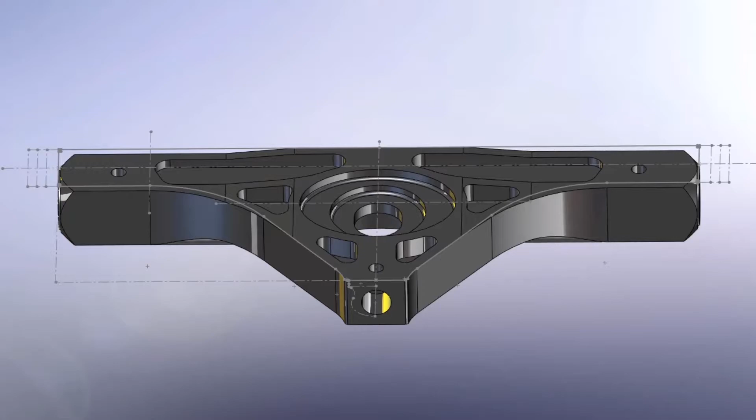We're excited to bring you the HSM and Fusion best practices today. Bruno's one of our normal presenters, and today we're also going to have Phil Brown from Autodesk. He's going to give us a preview of nesting in Fusion, which is a new development that came out earlier this year. So it should be a pretty exciting agenda today.

If you haven't been following Fusion, it has been expanding quite a bit recently, and they have added some different extensions. And so I just wanted to go over these at a little bit of a higher level. In fact, maybe we should go back to this other slide first. That's okay. Let's just stay on this slide.

Anyway, there's the additive build extension that has actually been out for a while. I think it came out, was it early last year? Phil, you might know the exact date when it came out. I think it was early last year. Yeah, it's been out for a little bit at this point.

Yeah, and generative design has been very popular. If you guys know, there's been big stories about Airbus and General Motors using this to redesign their parts and do really interesting things about lightweighting and changing really the way parts are made. That's more of a design extension for someone early in the design process.

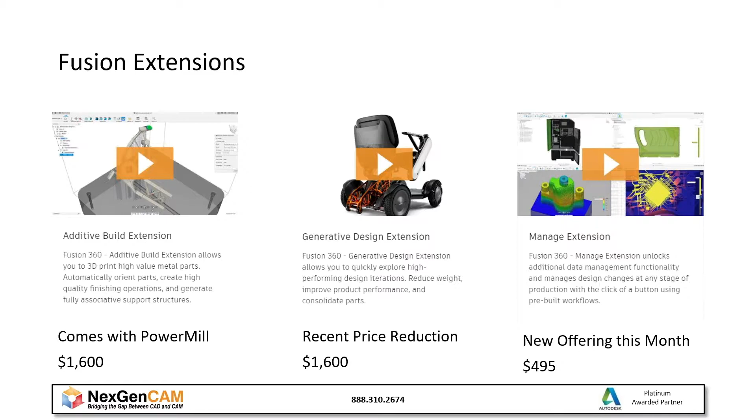So looking further into the extensions, the machining extension, this comes with a lot of the advanced CAM products. So if you have FeatureCAM or PowerMill, PowerShape, some of the PowerInspect stuff, some of those versions already have the extension. It comes with Fusion and it comes in that bundle. And if you want to buy it separately, it's an additional fee to get the separate extension of the capabilities that they have in there.

And then we come to the nesting and fabrication extension. And this is what we're going to go through, because I think a lot of you out there are working with a CAM product, and there is some nesting in some of the other products that we have. But we thought that the way that Autodesk has gone about nesting and fabrication was a nice addition to this package. And so I'm going to hand it over at this point to Phil Brown.

And Phil is the master of taking big blocks of material and turning them into smaller blocks of material that are more expensive. Is that good, Phil? That's good. I like it. Definitely works. Can you hear me? Yes, we can hear you.

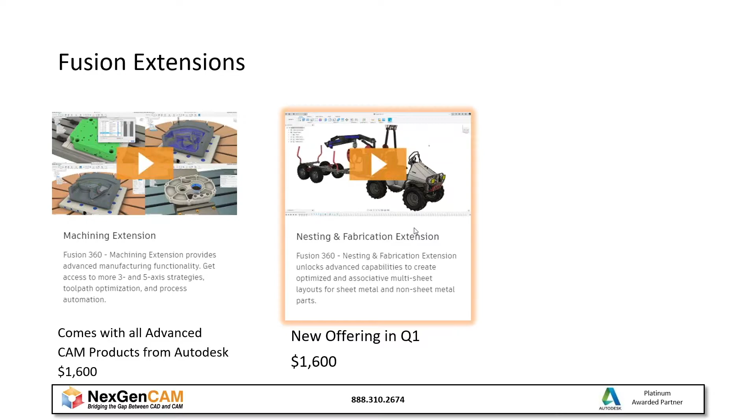Awesome. So yeah, my name is Phil Brown. I'm a machinist by trade. I've been at this 10 years. A little bit about me. I also own a plasma and router table in my garage, nonetheless. So I actually use the nesting and fabrication tab or page constantly when it comes to Fusion 360.

At this time, everybody should be able to see my screen. You want to go ahead and confirm that for me? We got you. Awesome. So I always like to start simple and get advanced very quick, because it always seems easier to know how to turn on your car before you ever drive your car.

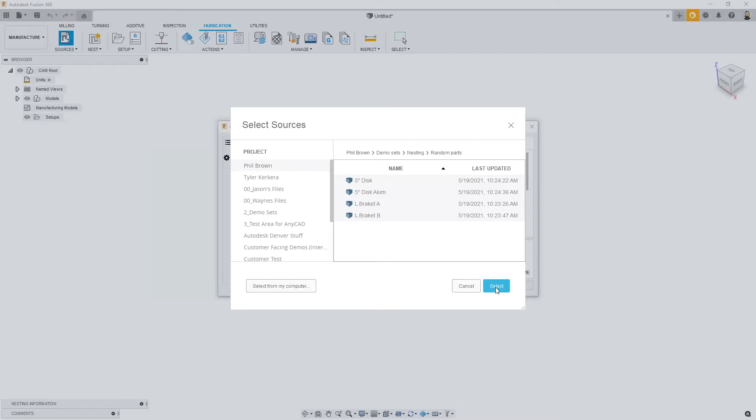So the first thing I always do is, if I've already got my design completed, or if I'm just rerunning a couple of parts, I just jump straight to the manufacture tab and I go right on over to fabrication, and then I could say component source. As you can see, this is currently a blank brand new file I opened up. It allows me to go out and pick whatever it is that I actually want to nest. So in this case, I have these 4 parts. They're all separate parts in their own, but I can pull in a bulk of parts in one shot.

As you can see, I have things like quantity based on my material type and my material thickness utilized for my nest. This is one big thing that sets Fusion's nesting apart from other software: we no longer care about a flat DXF file.

We actually give that file thickness, which allows us to create our nest based on that. If we walk through these menus real quick, you can see I have my 4 shapes that I pulled in, and I have my packing sizes. As you can see, I have 2 different packings here: one is steel 70 thou, one is steel 90 thou, and a 4x8 sheet of each. This is already looking at my parts to say you're going to at least need this material and this thickness. What controls how many of those is going to be my quantities.

So let's go ahead and plug some numbers in here. Let's say I need to do 41 of this one, I need to do, let's say, 107 of this guy. Maybe we just need a simple 100 here and 5 on the last one. So this is where I can control my quantities of each part on that nest.

A few other cool settings that I have, if you're somebody that currently works in wood and runs a router, we all know a sheet of plywood costs about the same as a brand new F-150. So that being said, I may actually want to increase my calculation time to squeeze every inch I can out of a piece of material. Or if I'm just cutting some simple plastic that's dirt cheap or scrap, I can actually turn this number down to relieve some processing power on my computer.

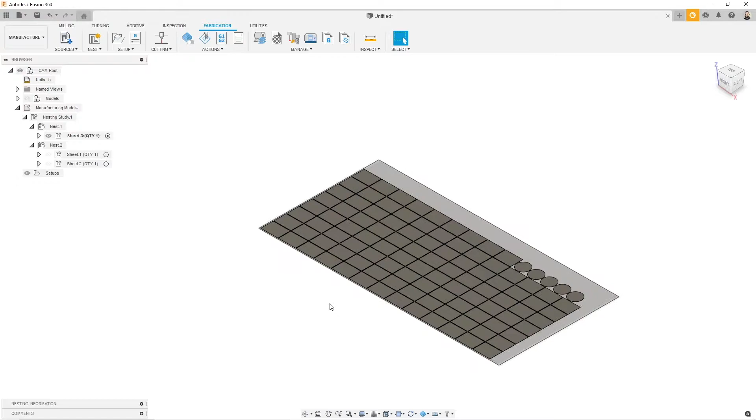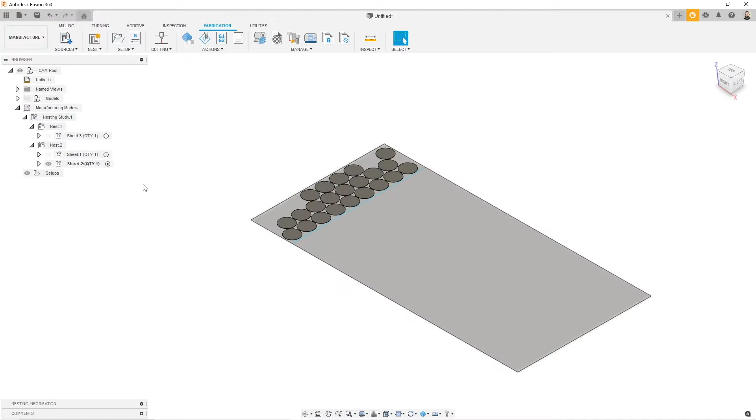So at this time, I know for my first nest, or as I like to say, this is my first sheet thickness, I need one sheet, and that's the shapes that I need to cut on that sheet. On my second thickness, I actually need 2 sheets, same thickness, but you can see I have one placement and a second placement automatically. The real nice thing about this at the end of the day is I also get this little blue line in here that allows me to go in and cut off a drop with a nice clean edge. So Fusion's actually already thinking ahead of me for that.

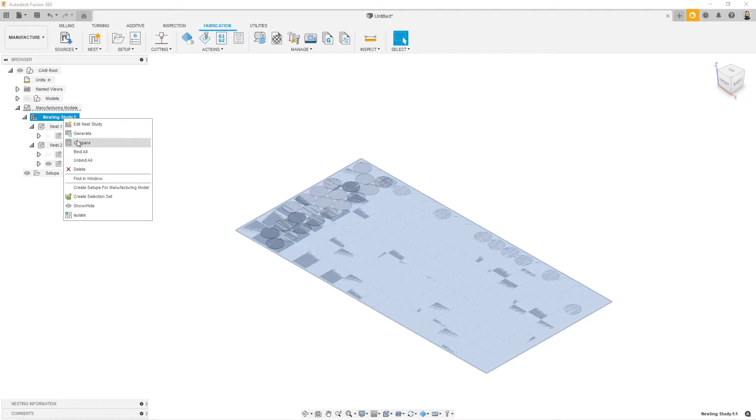A few other things that I really love before I get into my tool pathing is to go in and actually look at a report based on what I'm creating. So I've already plugged in some numbers for material cost, and from a very high level out the get-go, it says I need 2 different types of material thickness, and I need 3 sheets total. It's going to cost me $330 to buy it. However, I'm only going to consume roughly $220 of that material because of those couple of drop pieces.

When this is used for quoting, which is what I tend to do at first, is quote this for a customer, they're going to have to buy full sheets. There's no doubt in my mind. Truthfully speaking, I'm actually going to recoup some of my material cost.

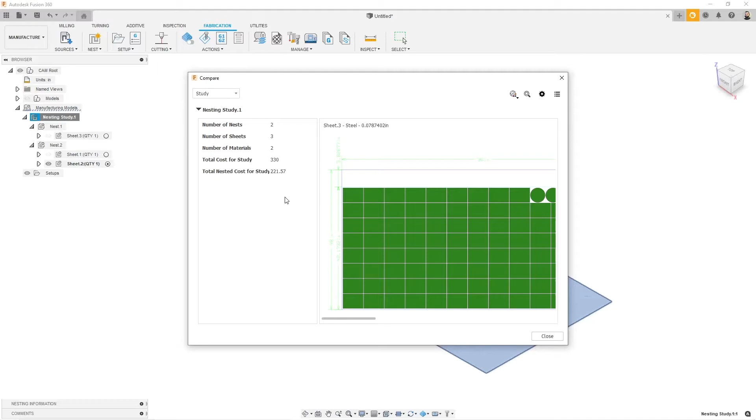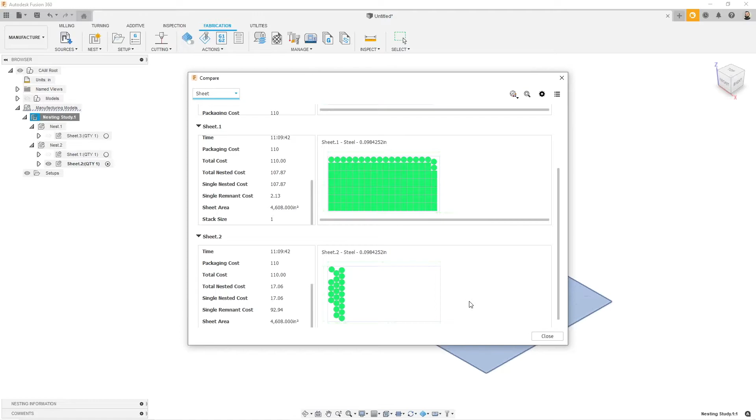Another nice thing about this is that you can actually go through and look at each one of your sheets to where it's going to tell me the thickness, the material type, when it was calculated, and what that's actually going to cost for my customer at the end of the day. And you can print these, you can send these to your customer. It's really up to you what you do with this report at the end of the day, giving you that power to really get more accurate quoting before you ever even turned on a machine.

And as a lot of you can see, I did a lot of this within 5 to 10 minutes. That could be all the difference on making or losing money on a job because somebody got the decimal in the wrong spot.

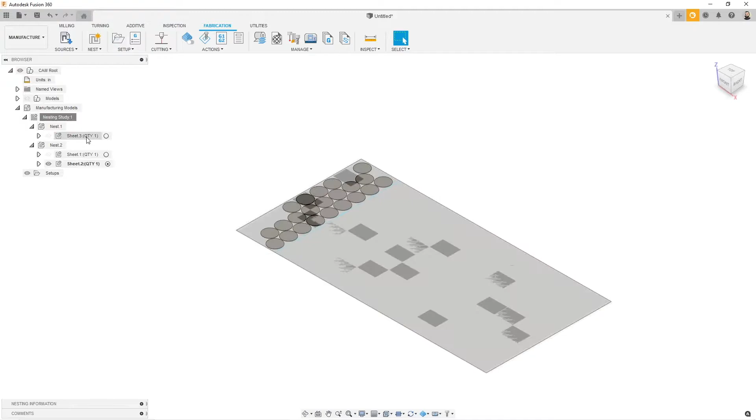So from here, let's go ahead and start to generate a couple paths. First, I'm going to activate my sheet that I want to cut. I'm going to right click on it. I'm going to go down and I'm going to say create setup for manufacturing model. What this does is it brings in that idea of where is my origin on my laser table or my plasma table to cut these parts.

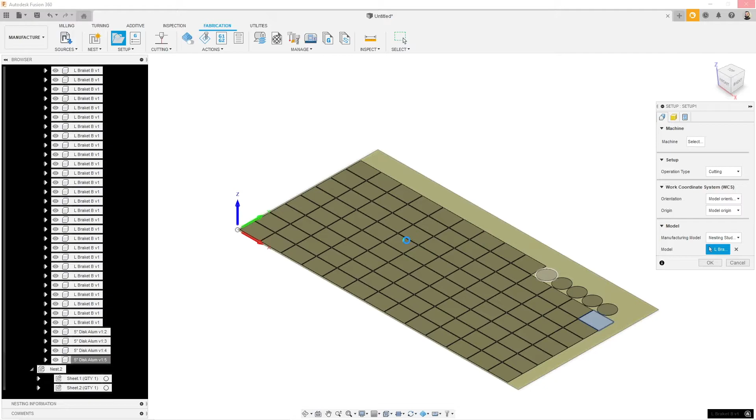One thing it's also asking me for is my models. So I can quickly come in here and actually just highlight each one of these by clicking the first one and then going all the way down to the bottom and holding shift and clicking my last one. So what this is going to do is select all of my parts to be able to manufacture those or to apply my tool paths. This is also going to prevent me from getting a little bit of an error here in a moment had I not done that. So I'm just avoiding it. Just know for most people that you don't have to worry about this.

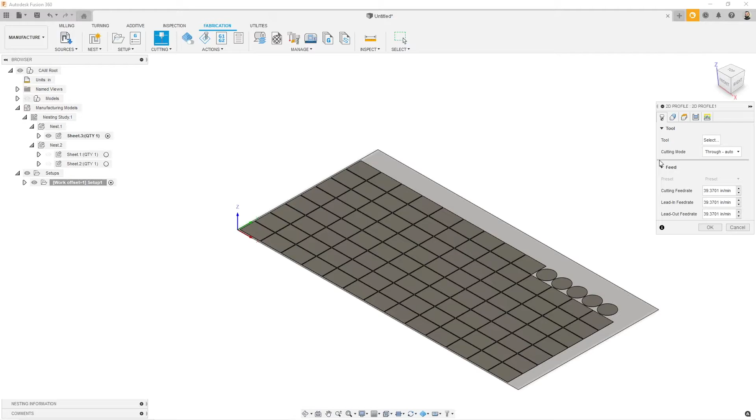If you are doing router work, one thing you need to do is you need to say milling versus cutting, or you'll also get a couple of errors just because Fusion's smart enough to know that, hey, you can't router on a laser table. So now that I created that, let's go ahead and do a cutting 2D profile. At this point, I'm going to go in and select my tool. I have a Langmuir system plasma. I simply have my plasma cutter. The kerf width on my plasma cutter is 40 thou, and I like to keep my tool up by 50.

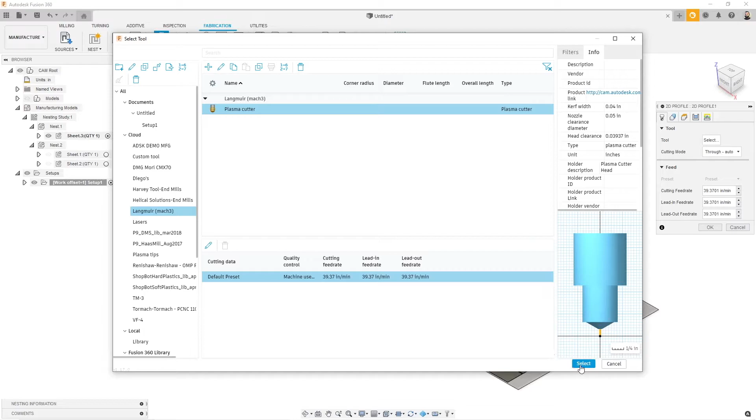These options are fully customizable, as well as you can actually create multiple speeds and feeds based on whatever you're cutting, material thicknesses, or maybe in the fact that your controller can do this. This is common with things like a flow water jet or a laser, is you're going to tell the controller the speeds and feeds, to which then this will be ignored.

What it's asking me for is to pick what is it that I want to cut. I'm actually going to zoom in here real quick, and you're going to see with my mouse, I'm going to highlight that first square and pick it. You could pick whatever square you choose at the end of the day, but I'm going to go ahead and just check mark and say pick everything on that plane. Just like that, I actually went ahead and selected all of my parts for cutting, using that plasma cutter start to finish to cut all my shapes.

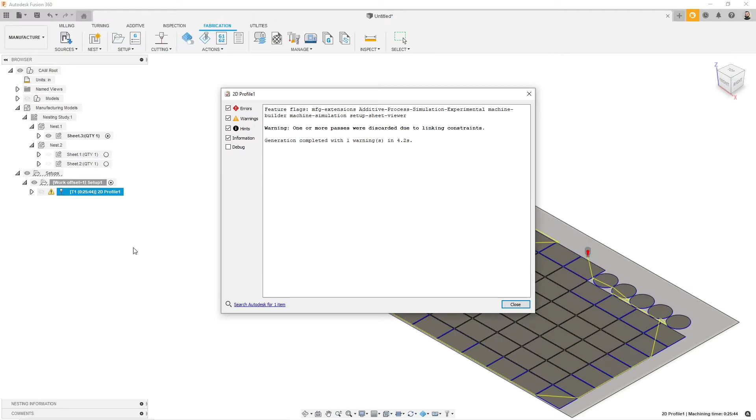And then lastly, you can see I actually get an error here, which is kind of nice. So it says one or more was discarded due to linking. I can tell you from my experience what's going on there is if you think about my lead ins and lead outs, they're probably too long to bridge that gap between my parts. We'll come back and fix this, but let's just look at posting some G code. So at this point, I'm going to go ahead and say post process.

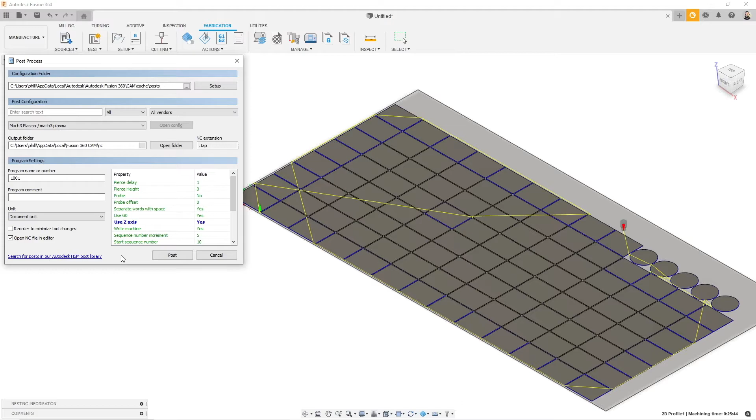If I'm working with an Amada laser, I can go ahead and search A's, scroll down to my Amada laser. In this case, it won't let me do it because I'm using a plasma cutter. So let's just jump down to maybe like a Mach 3 plasma post or something of that nature. So Mach 3 plasma post. I have some properties here I can toggle on and toggle off based on certain scenarios. Sometimes you have a Z-axis, sometimes you don't. Sometimes you have a torch height controller. It's just based on your machine and what you're doing.

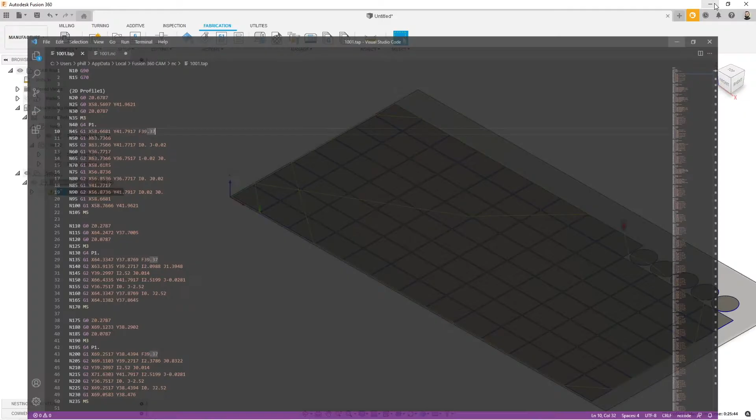This is where I would take something from a thumb drive, transfer it over to my Mach 3 software or my Amada controller, whatever laser, plasma, or water jet you're using, and I can spit this G code out and run my machine. From here, let's go back and make a couple of corrections. So judging by my quantities, my option is either change my spacing or change my lead ins and lead outs. Let's start with the lead ins and lead outs since that's the simplest thing here.

Let's go to my linking tab. Looks like my lead in distance is almost 200 thou. What if we bump that down to roughly 0.1 and go ahead and hit OK? This should remedy my problem.

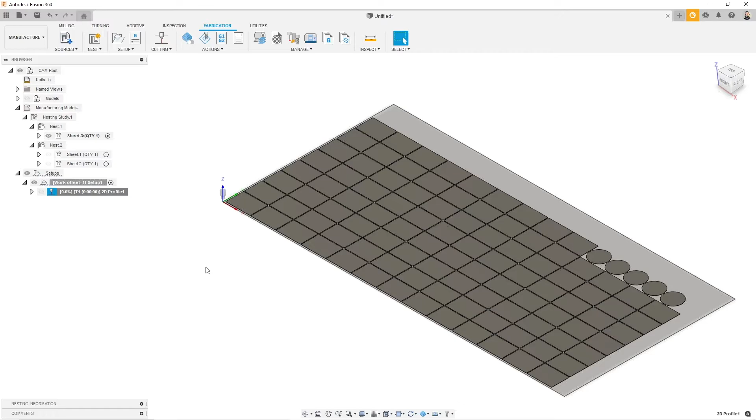If not, I could shorten that length up a little bit if need be. As you can see, it did remedy my problem. Or I have the ability to always go up and just change some things like the spacing on my material. So for example, this is my packing size and my cost.

So that's where we're getting that for our situation, as well as if I wanted to add some trim to the outside of the sheet because it's not square, but I can actually go in and say anytime on an 80 thou thick piece of steel, I want to space my parts out a minimum of 1/4 inch to each one. And just like that, I can make these changes.

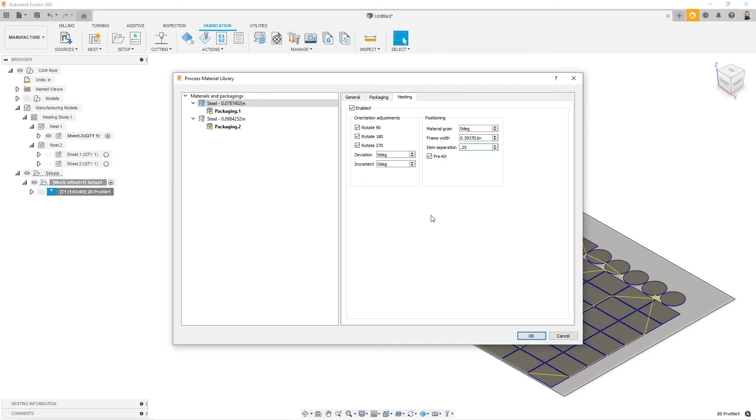And what that change is going to do is tell me, first off, I need to regenerate my part. So let's go ahead and do that. I'm a fan of hotkeys, so I'm going to push Control G and hit yes. And what that's going to do is actually redo my tool path. And that's because I selected the wrong thing. So let's go back to the top and generate the nest.

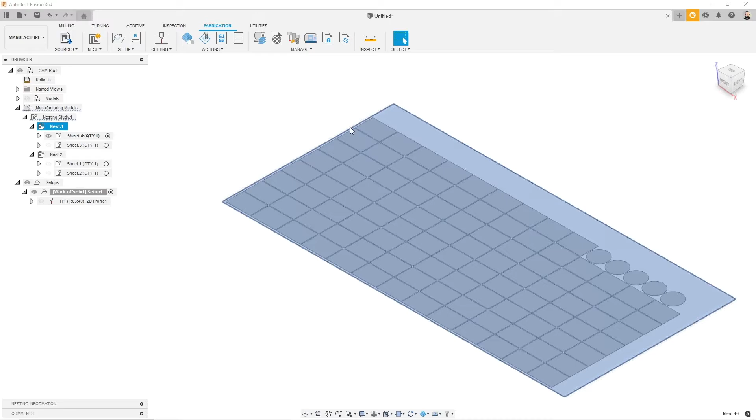So you're not going to see a 50 thou shift on anything here, but it actually did change the number of sheets that I need to make this part, which is kind of crazy at the end of the day when you think about that from a little bit of a spacing.

So at this point, this is a good workflow. As I like to say, this is my get everything out by Friday workflow, where I'm going to go out and just grab all the parts that I need by Friday. I'm going to nest those out on those sheets, and then I'm just going to get my plasma cutter running as fast as possible.

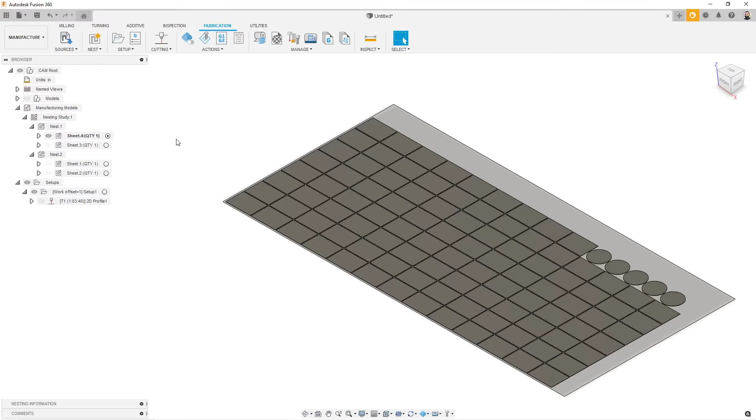So this is what I like to think of as my quoting strategy for nesting out a part. So we're going to go ahead and create another nesting study. Maybe my customer only wants 5 of these. Same kind of concept. We have our packing sizes that, as you know now, you could edit and change, as well as my output options. So there's not a lot more that I'm going to do at the end of the day on this file.

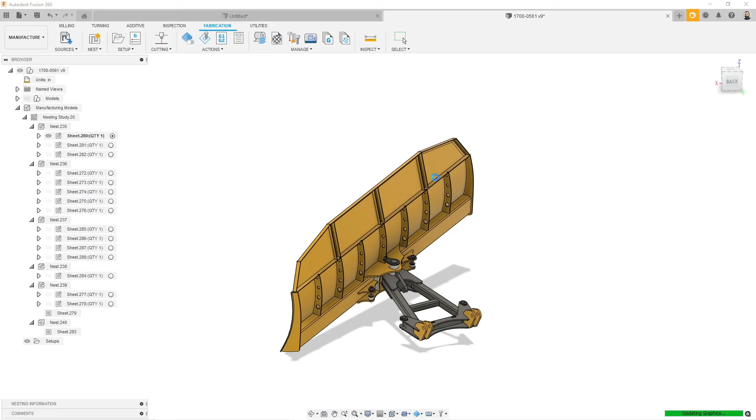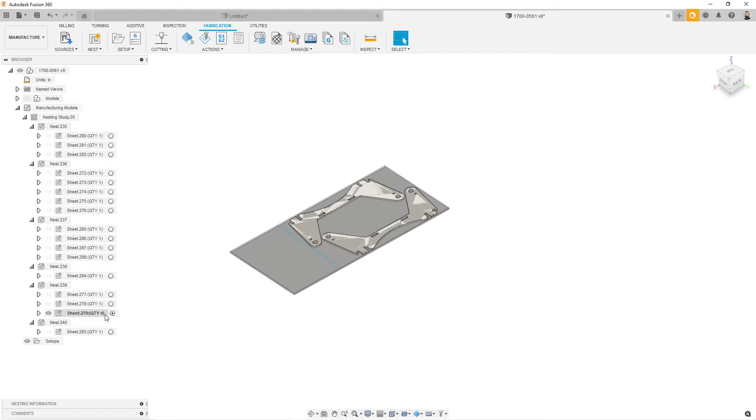And as you're going to see, it's going to go ahead and calculate all those sheets again, getting me to those results. So as you can see, based on a sheet size that I'm pulling from, that's all I'm going to fit there. So I technically need 3 different sheets cut out with these profiles. In this case, down here at the bottom, you can see I have a quantity of 4. Well, my sheet is so small, I actually need 4 of those sheets identical. So again, we're going to squeeze as much as we can out of what it is that we're doing.

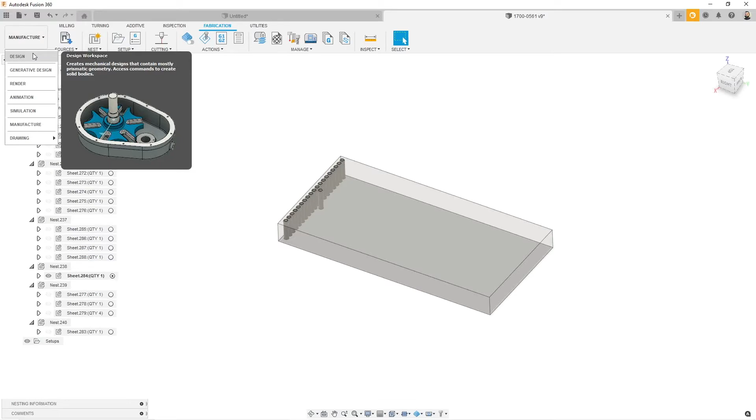And one part that did actually sneak through that I would never nest, as you could see, is these pins here for manufacturing. So this is where I have some control over my nest from when it was a design. So let's go ahead and jump back to my design side of things. And as you can see, this is my complete assembly for this plow. I can actually go into my tools tab and do a nest preparation.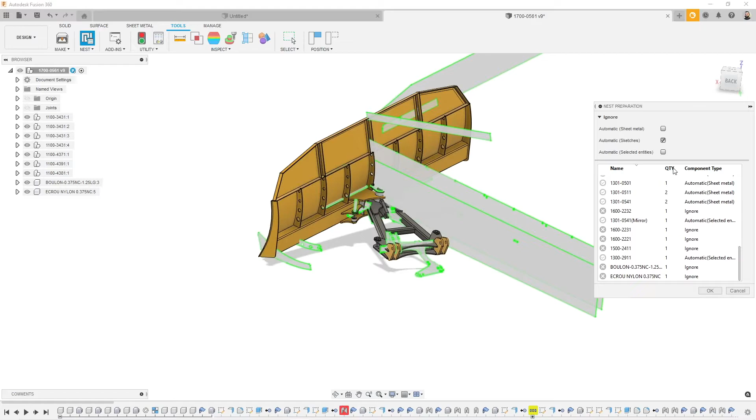And what you're going to see here is, yes, I've done a lot of different things in here where I've ignored certain things and made sure that they didn't automatically select. But for example, if I'm looking for a specific part, or if I know there's a quantity based on that part, just so happens it's that nice little pin right there causing my problems, I can say ignore, because this is a store-bought part. I don't need to actually go through and nest it out. However, these custom washers are something I really do want to nest out at the end of the day.

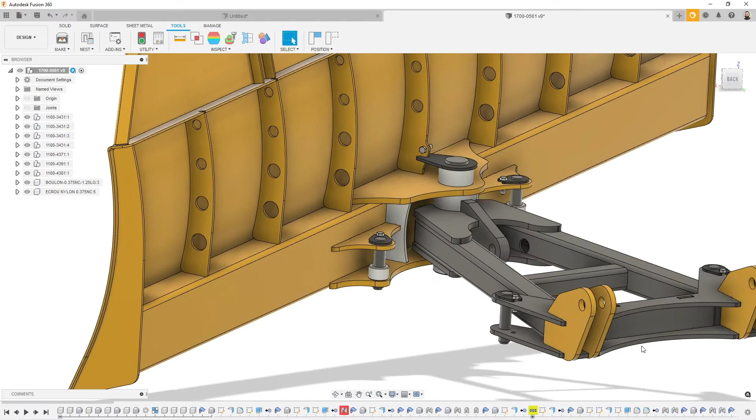So just like that, I can ignore a component and then jump back into my manufacturing tab and actually regenerate or just delete that nest that I've already had. And if you guys look here, we actually eliminated it completely from the nest automatically. So Fusion is even smart enough to see things like that.

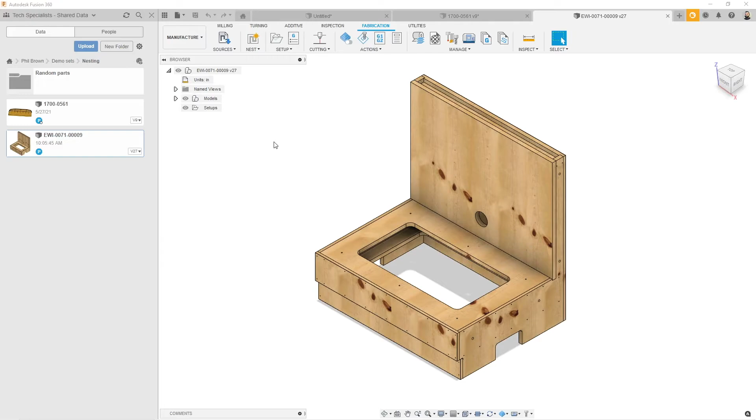I know at this point we have covered a lot when it comes to welding and fabricating. The same concept at the end of the day will still apply to the nesting of wood components. So if you're a cabinet maker, or somebody doing intricate things, this part here just so happens to be a printer stand for road shows or farmers markets. It's all been designed and sketched up, ready to go. I just need to do the same concept.

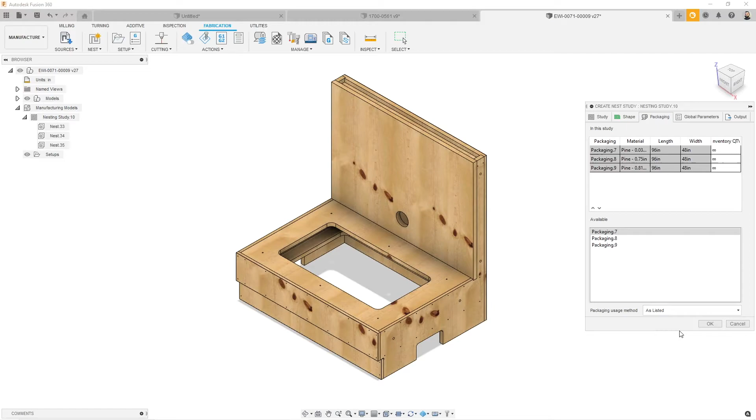Let's go ahead and create a nest study based on wood. Same concept applies. I can nest it in the assembly, or nest it out with several other things I'm working on. We're just going to say 10 of these. My packing, as you can see, is even recognizing these boards are pine and the thickness of that pine, to which when I nest this, it's again the same concept, start to finish, makes life very simple to get straight into doing things with a router.

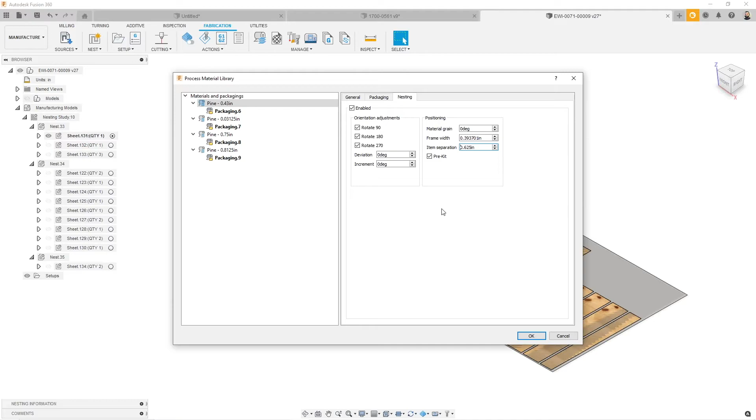The only difference I really find myself doing between a router or actually cutting with a laser table is the separation between my parts at the end of the day. That's really all that I find myself making a difference when it comes to nesting in Fusion 360. But the same is still in there.

If I want to compare these, if I want to look at material costs for my customers, if I want to look at my nesting sizes, if I want to quote this, I could quote this out probably in 10 to 15 minutes, apply some generic toolpaths, and give my customer a much more accurate idea of what it's going to take.

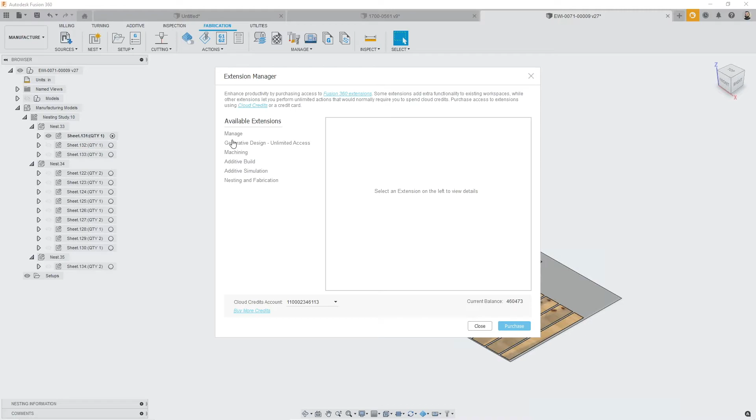Outside of that, nesting is relatively a very easy thing to learn. I personally have learned it by clicking a couple of buttons. For a lot of you out there that are curious about nesting, you do have the ability to actually turn on the nesting extension for a 7-day free trial.

There will be an option here based on what's going on. It's nothing more than a drop down and clicking, hey, I want to try the 7-day trial. And with that, you also have the option of turning it on for 30 days. Or what really works best is if this is something you really see yourself using all year long. I just use it on Saturdays and Sundays. It paid for itself in about 2 weekends after one of my neighbors saw my fireplace.

That being said, you could turn it on for the year for a much better prorated price. I think at this point, if there's any questions, people are more than willing to ask them. But that is kind of wrapping up nesting as a whole for a start to finish procedure when it takes either assemblies or individual parts and nests them out for manufacturing.

A question, there were a couple questions that did come in. One is, do you have to do a lot of setup for your operation in Fusion just to get it all set up with your pricing and your sheets, and what kind of setup is required?

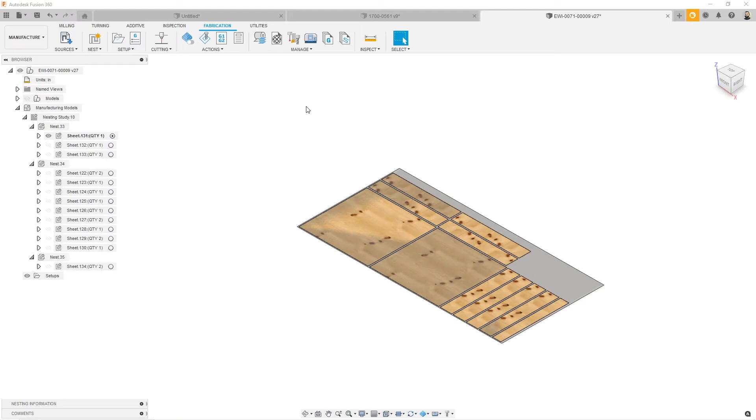So the great thing is a lot of times it's self-recognized as you go through Fusion. So the first time you ever nest something, a lot of these packings are getting pulled automatically or generated on the fly. It's just a matter of you going back and either editing them to what size you want, or actually saving them out to be pulled from later. So you don't necessarily need to go in there today and set up every single sheet that you've ever touched, because as you're nesting, it's going to start to generate those sheets and store them in your library.

Okay, that's great. So it is very much out of the box friendly. So I will tell you, the first time I ever ran it, I went in and clicked about 10 buttons and I had a nest, and I'd never even seen an article or watched a video on it. And I figured it out very quickly on my side.

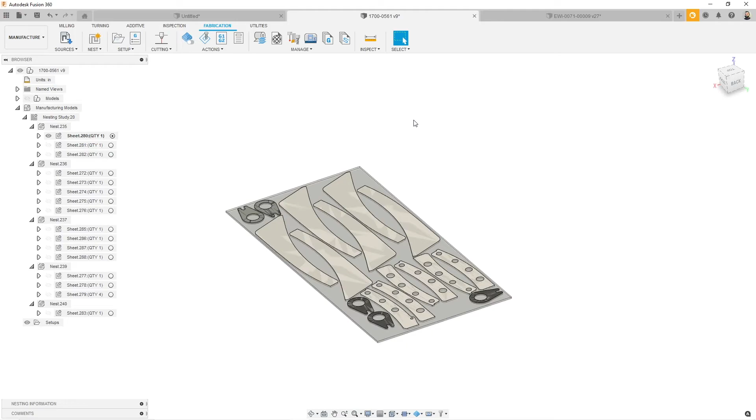One question that came in was about installing this. Is this a separate install? Obviously it's in the cloud, and I know the Fusion install is very quick, but is this another installation, or is it just you're adding it into the cloud?

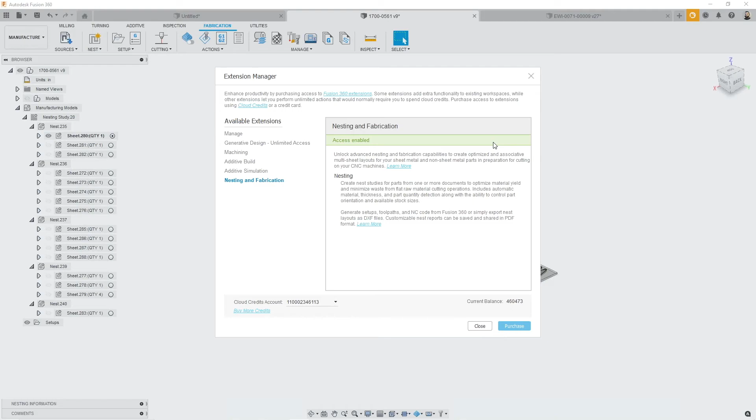Nope, this is actually already installed with Fusion 360. All you have to do is either purchase through Next Gen CAM, the nesting and fabrication package, or activate the 7-day trial right here through the extension manager. Nothing actually downloads or installs, it just automatically turns on in the background. So you technically have it there, it's just not activated.

Keep in mind that although Fusion is a cloud-based software, it's more of a hybrid. This is still installed on my computer. If my internet was to go out today, I can still do nesting just fine, I can still work with what I'm working on. The only difference is a lot of my files are stored in the cloud. When it comes to machining or manufacturing, I always laugh about this because it is still a desktop install. Nothing that you've seen me do, other than open my file, technically comes from the cloud.

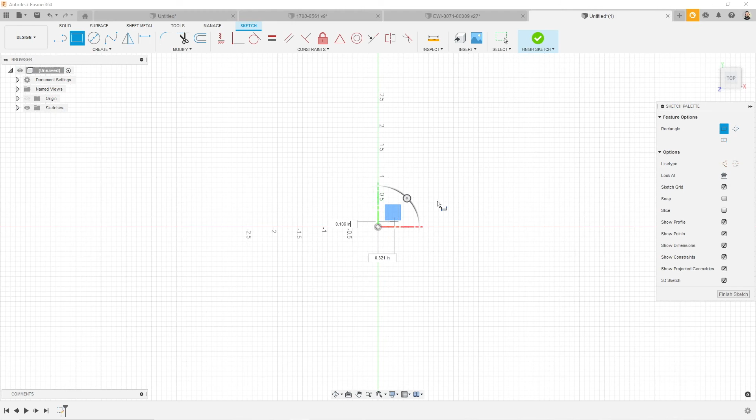Can you do nesting based on a sketch, or do you need to add thickness to the part? At the end of the day, you can, but I really don't recommend it. If we started with a simple sketch, regardless of what the customer is working with, it's very easy for me in sheet metal to just say flange, click that part, and then I have a much more advanced feature where I can apply sheet metal rules.

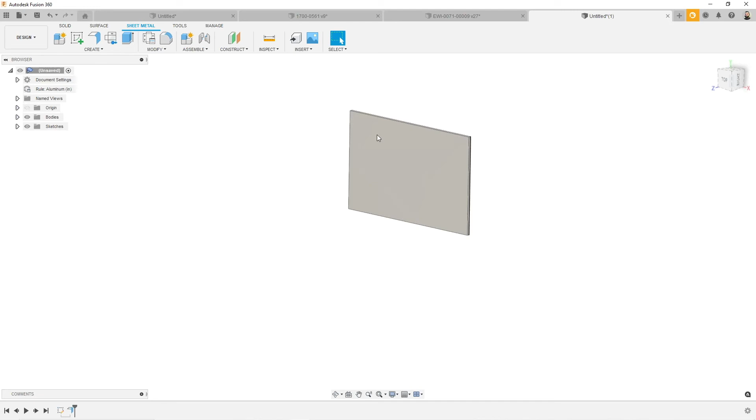In your rules, you could have the thickness, the K factor, and things like bend condition. Why that's important, giving it thickness, is so that it puts the same thickness, same materials together. If you're someone like myself that enjoys making crazier things, you could use that same flange tool to create your sheet metal part, then do a flat pattern. Although you could have that DXF with that flat pattern, you're going to miss out on things like your bend radius, start point, end point, and center points for your manufacturing at the end of the day.

So it's one of those things - can you do it? Yes. I do not recommend it because you're almost forcing Fusion to do something it doesn't like, especially when I can add thickness to something in a few seconds.

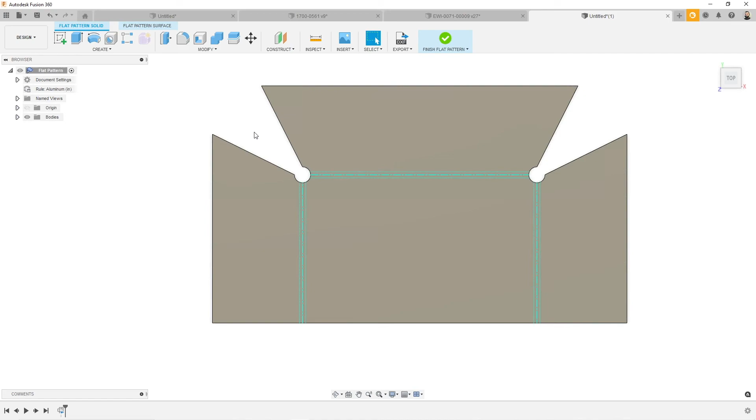What about if you import a file of a sheet metal part that came from another software - is nesting able to flat pattern that imported file? Yeah, so for example, if you brought something from SolidWorks and it was sheet metal, given that it has the true thickness everywhere, you can actually convert that to sheet metal and then create a flat pattern of it. So we do have the ability to translate a SolidWorks sheet metal part, lay it flat, and then take it over and cut it out on your laser or plasma. Okay, that's good to know.

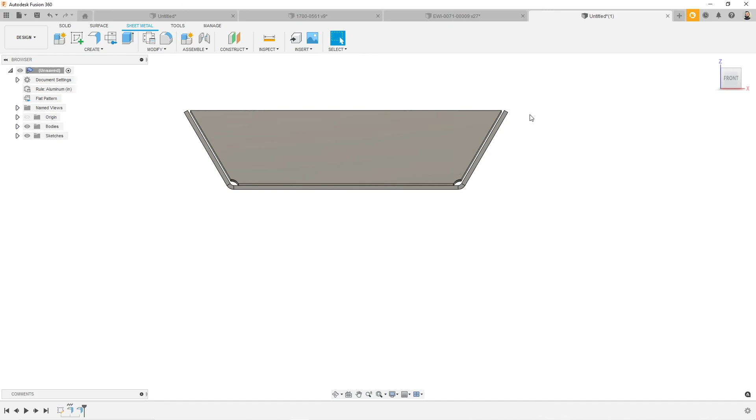I know we have quite a few people using Fusion with the laser, and just on their water jet and that sort of thing, right? That's been there - that's in the base Fusion 360, if I recall.

Realistically speaking, I could always take this part that we just drew in real time, and I could actually take it and go cut out one of them. There's no doubt that you can do that, as you're going to see here. Give me one sec - I kind of clicked the wrong line. I can go out and cut this part relatively easily and run one of them.

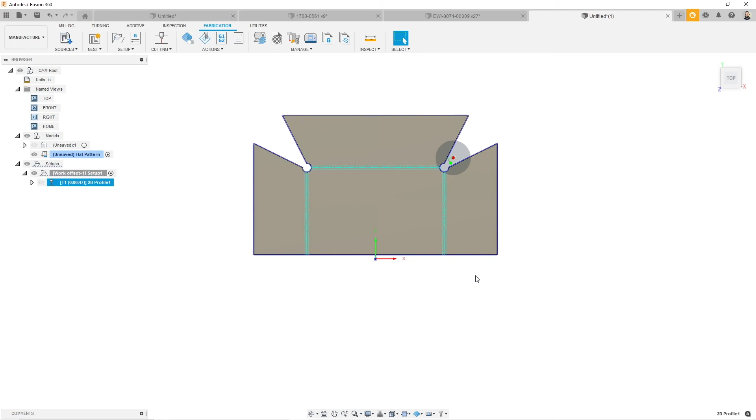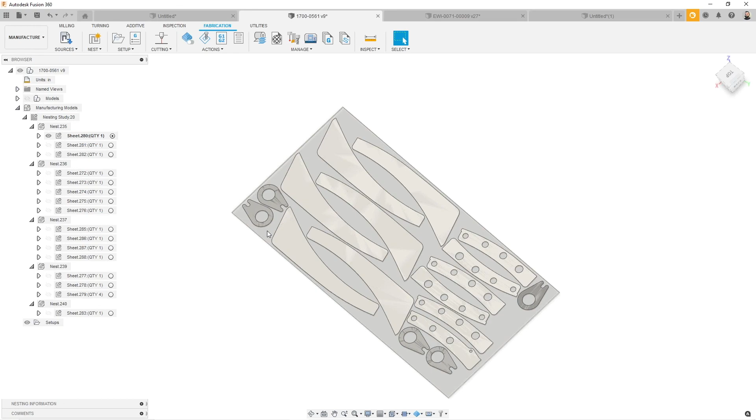The true value of the nesting situation is when I need to make 100 of these, or 10, or 50. I always laugh because on my plasma table, if I'm going to nest something like this, I have some dead space areas, so what I tend to do is squeeze in business cards. It's a simple design, the size of a credit card, with a cutout to open bottles, and it has my name on it. Anytime I can squeeze some of those in there for free, it's something I throw in a box of parts or on a pallet of parts.